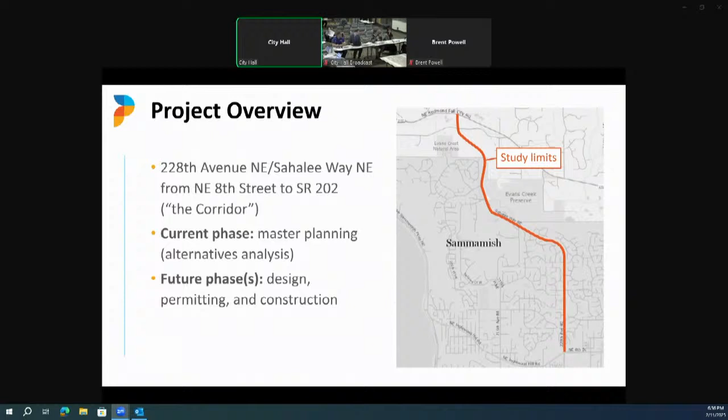The next three slides we're going to discuss what are the advantages of a corridor study. Part of it is comprehensive planning. We identify the current situation and also the future transportation demands, looking at future conditions and all the needs across different modes of travel for all users, so that it's safe for them and also accessible.

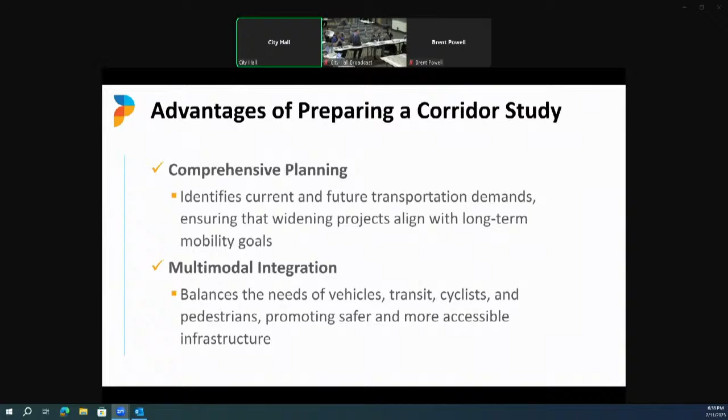We also look at the constraints in the natural environment, the environmental concerns, and the geotechnical realities that constrain the project. We're learning about those early on so we can look at cost-saving measures, and those impact and affect the different alternatives that we look at.

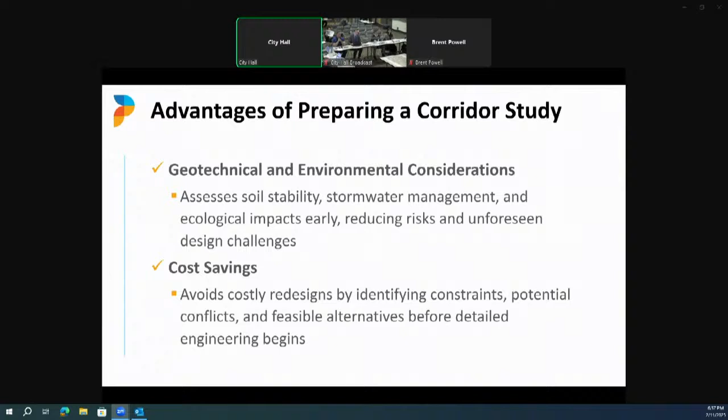We also had an opportunity for this project with broad community engagement. We involved the stakeholders early. For instance, the water district on the north end — we worked with them on their water replacement program, their water main replacement, because it was impacted by our schedule and where our improvements are going to be located in the future. So that was another benefit, we won't have to relocate those again.

This is the master planning process. We want to look at what we do near term and then long term on the corridor. We're going to have a long-term vision, but then we'll have chunks that we can start building in the near term that don't need to be partnered necessarily with grant funding.

The steps we've done to achieve that: early last year we had goal setting with the public and with council first, and we got the objectives, what was important to the community. Then we used all the different disciplines on this team to do a technical analysis and cost estimating, so we could bring alternatives that meet the goals we heard from last year. We're going to be going over that today.

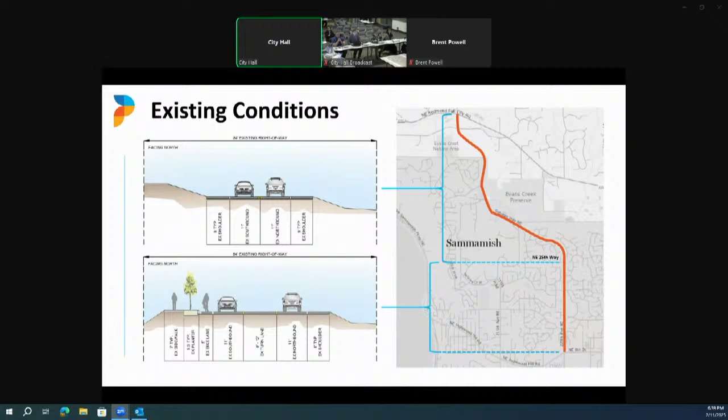And I think with that, I'll turn it over to Brent for the planning phase progress.

Thank you, Jed. Good evening, all. Brent Powell with the Perteet consultant team. I'm the project manager for Perteet on this one. I'm going to talk through the progress we've made to date on the planning phase for this study.

That's what we intend for it to be: up to 3 public-facing alternatives, with the idea that the next step will be sharing those back with the public. To date, we have not shared directly with the public for feedback any of these 10 or 6 current alternatives. The next step will be seeking public feedback on those 3, and then ultimately reaching a preferred alternative based on that public input, plus all the technical analysis and consultation with you all on the council here.

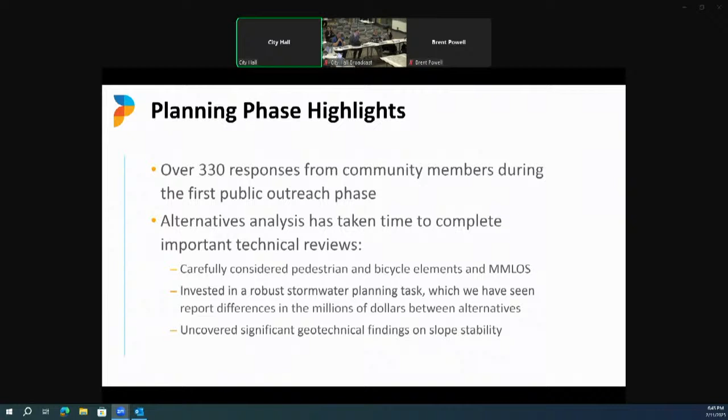Donald is going to be sharing some very notable geotechnical evaluation findings we've uncovered during this phase of the study, particularly on slope stability. I'll pass it to Donald, with a quick intro that he's with HWA Geosciences. They're our geotechnical engineer on this consultant team for the study and for the design phase of the project as well. We did evaluate the entirety of the corridor here from 8th all the way to SR 202.

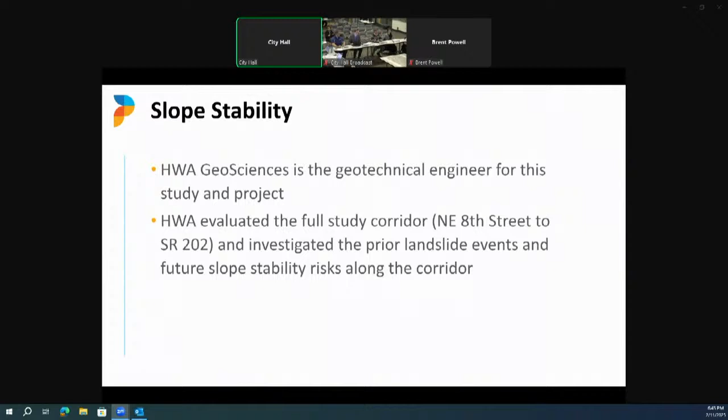I think many of you are familiar with the landslide history on this corridor, so that was of keen interest to Donald, and I'll let him share the results of his analysis.

I'm actually kind of disappointed I don't have entry music, but this is the moment you've all been waiting for. We're going to talk about soils. Try not to fall asleep.

So what we're looking at here is a LiDAR image of the entire corridor highlighted in red. The project alignment can really be broken into 3 distinct geotechnical zones. The southern portion has pretty much stable conditions, so we're not going to focus much time on those tonight. Then moving north, basically up till about 37th Way, you get to a point where there are a lot of adjacent landslides that haven't yet affected the roadway, but we need to consider them as we move forward in design. North of 37th, you have landslides that have significantly impacted Sahalee Way in the past and have been mitigated, but we need to consider those and what we do in those locations moving forward.

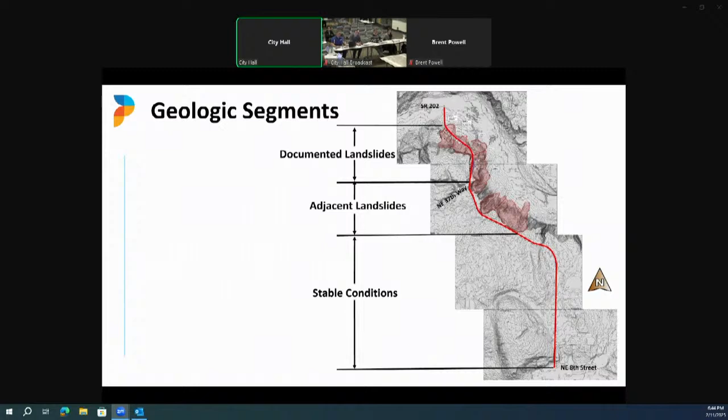So if you look at this a little zoomed in, this is again a LiDAR image, but we've highlighted in red each one of these landslide zones. There are 7 of them, 1 up in the north and 6 down here. Each one represents a distinct time in either recent history or ancient, prehistoric history in which there has been a landslide, denoted by these landslide scarps that you see in topography. There's one more as well, but we did not highlight it because it's far enough away from the road that it won't affect our project.

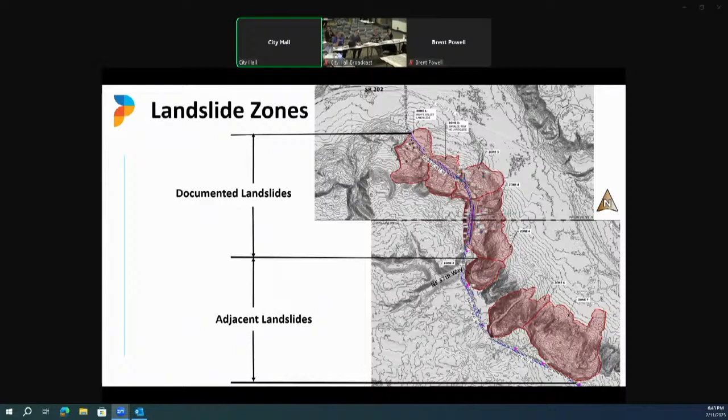So the first thing we're going to do is talk about zones 1 through 4, which are the northern portion. These are landslide areas that have affected Sahalee Way in the last 60 years and have been mitigated.

To the north, this one right here is the Happy Valley landslide. It was movement in the 1970s. They mitigated the movement through installation of horizontal drains. For those that don't know, horizontal drains means you drill into the side of the slope, put in a perforated pipe, it collects water out of the soil at the slope surface, and then you route it out to a suitable discharge location. It's a very common way to mitigate landslides that occur due to seepage, which almost all these do along the corridor, and I'll explain that in a bit. So anyway, that occurred and has been mitigated.

Zones 2 and 3, right here where the road bends, occurred between 1996 and 1997. Again, displacements within the roadway, mitigated by drains in 1997, so there's a theme here.

Zone 4 right here happened in 1982. You had up to 13 feet of movement over several months. Again, horizontal drains were put in. These ones aren't as distinct to see on the roadway, but when you're driving through here, if you look up to the west, you can actually see the headscarp on the side of the road where the soil used to be before it came down.

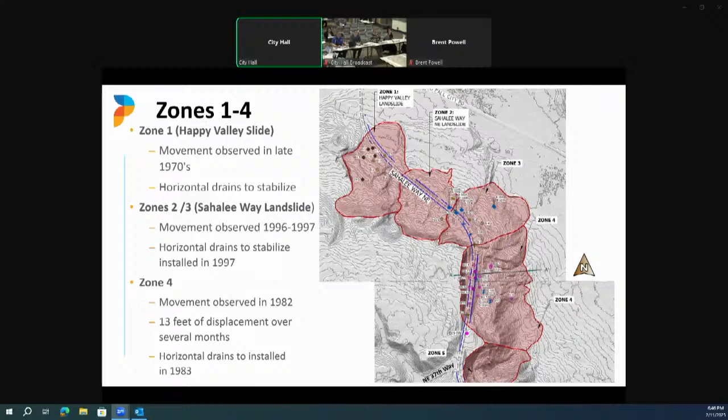This is a picture of that 1982 landslide. Again, that 11 to 13 feet. It's basically a slump failure that occurred there. Again, due to the soil conditions, they put in the drains.

These are some examples of the drains downslope that are currently being maintained. As you can see, water is flowing out of them. The more water you collect here and divert away, the more stable your site is.

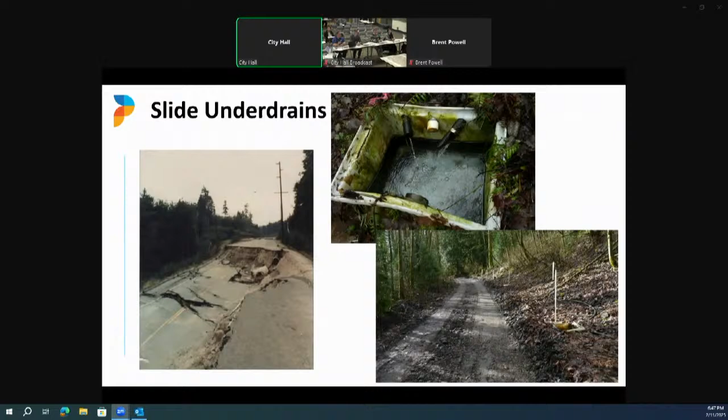Going into what has been done in the past: originally, when this Zone 4 landslide occurred, Golder and Associates, a geotechnical engineering firm, did a lot of the geotechnical borings and evaluations here, and was retained for the initial conceptual design of the roadway, looking at what concepts would work. They did a stability analysis which basically said you can do some improvements under static loading conditions and things will be roughly okay. Again, that's static loading, not earthquake.

Subsequent to that, we got involved because Golder no longer exists. We looked at the data they did and developed a much more elaborate geotechnical cross-section. You can see right here, that's Sahalee Way, and that's the headscarp you can see up at the top to the west. This really explains why all these landslides are occurring.

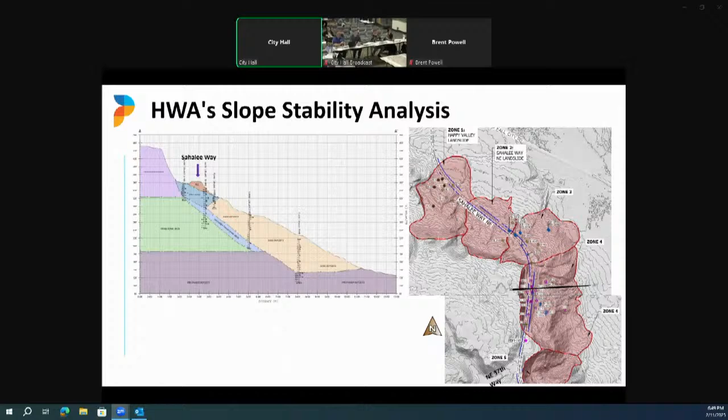So we evaluated that in our own analysis and came up with very similar answers to Golder: when we look at the proposed improvements in this area, we get factors of safety at 1.7. Basically, all you need to know about factors of safety is if it's less than 1, it's bad, that means you're going to fail. If it's greater than 1, you're not going to fail. So this meets industry standards for static loading, again in lockstep with what Golder analyzed before.

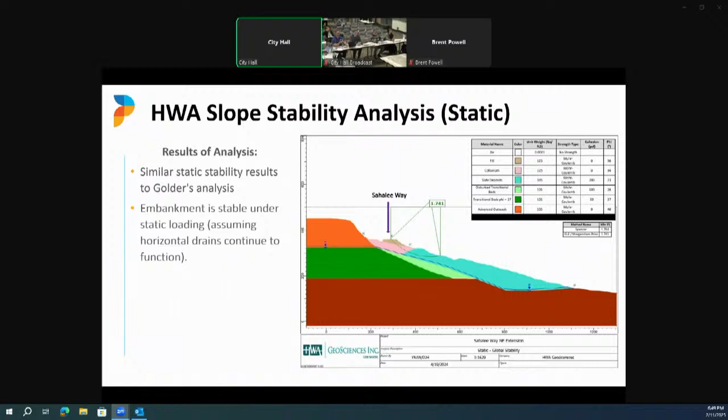The thing that's a little different is we also evaluated the stability of Zone 4, the 1982 slide, but you can assume the results of Zone 4 are very similar to Zones 1, 2, and 3 as well, because it's all the same rough geometry. This indicates right here that you have a factor of safety slightly less than 1, and as I mentioned before, factors of safety less than 1 are not good. This means that in a design earthquake, which for our industry is an earthquake assumed to return every 1,000 years, it's a big earthquake.

Obviously, we've never seen one—the last one was 1,100 years ago. That you're going to get some movement in the slope. We did a displacement analysis, and that movement is on the order of several inches, less than a foot. So it's not catastrophic landslide kind of movement. You've got to probably repave and regrade a little bit. So during a seismic event, you're going to get some movement out there, and that's something we need to acknowledge under the current loading conditions.

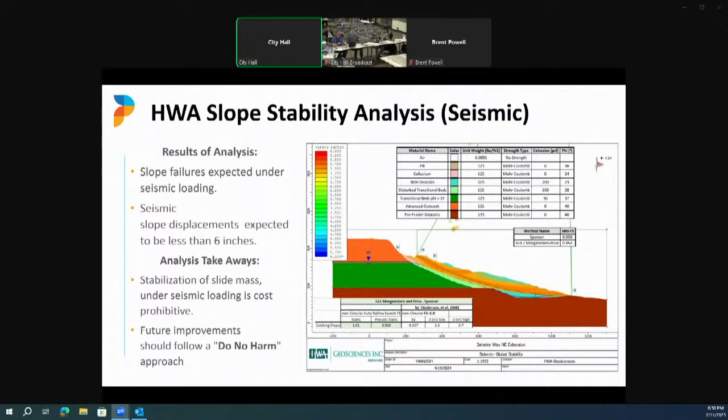One thing that's really important is that the drains in this area continue to function, because that is what is keeping this site stable. If those drains stop functioning, then water is going to build up and you'll start to see movement again under regular static loading conditions. What we are doing, and we're actually in the process of today, is installing a slope inclinometer right here.

This is basically a device where you drill a boring into the ground—this one we're taking to 125 feet. You put a pipe in it, and you can drop an instrument, and it'll tell you when you do drop the instrument, it should be vertical. And this is some outputs to it. Then if the land moves, the ground starts to move, the pipe deflects, and the instrument will read it, and it'll tell you where the deflection is.

We've put that instrumentation in the event that for some reason the drains plug here and we start to see movement. You can go out there and read that thing and get a lot of really quick information for a quick, appropriate fix to the movement. So it's a preemptive measure that we're putting in to help the city in case something happens.

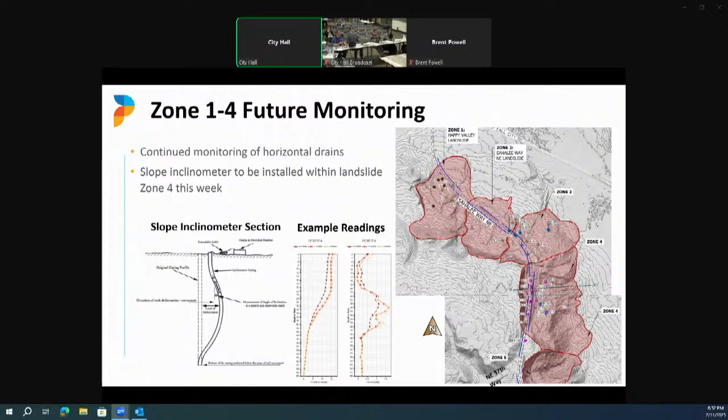The next area is to the south of 37th, and this is areas where these landslides are occurring for the same reason as the ones up there. It's just they have not reached the road yet. But what I really want to point out here is that Zone 5, right next to the intersection, and Zone 6 right here, those headscarps are feet off of the back of the fog line right now.

So these soil conditions here are good soil, high shear strength. You don't expect significant sliding except the seepage-driven part, which the seeps are down here. So what we would expect here from a future slope movement perspective is that weathering processes, freeze-thaw, you're going to loosen the soils on those steep slopes, and eventually at some time period between 10 and 25-year intervals, you generally get a slough of that 3 to 5 feet of soil, and it exposes new soil, and it tends to retreat back slowly. Zone 5 right here is probably the steepest of all of them, and likely the one that would move the soonest just due to how steep it is.

Zone 6 is also very close to the roadway, but it's not as steep. But the challenge of Zone 6 is if it does move, there's a whole bunch of utilities in there carrying water. If that breaks that utility, this goes from a slump to a water issue—it just makes it a lot worse. So I would say a failure here is more likely first. A failure here would be more challenging because it would probably take out more of the roadway.

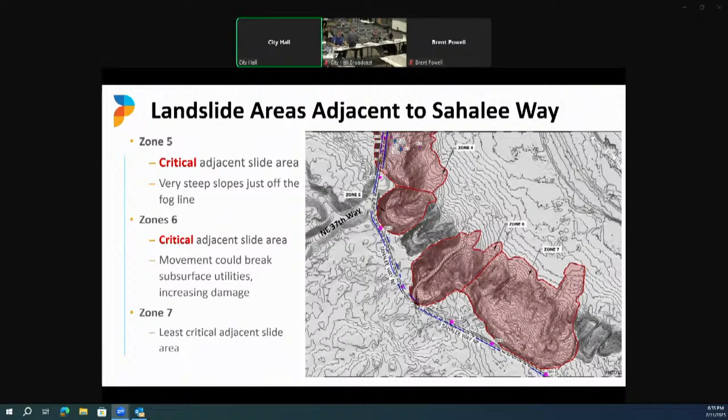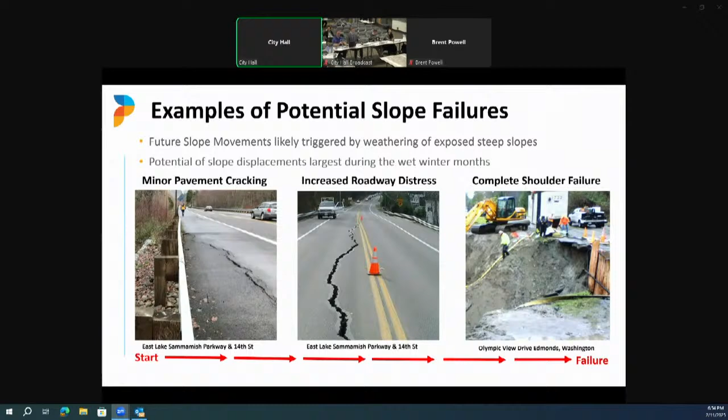This is kind of an example of what we would expect the progression of something to be if it did happen over time. You're going to start off with a crack off your fog line. The crack will move further in if you didn't mitigate it. And this is an example of what it can do if it continues. This is very much like what the '82 slide looked like—it's just this one's in Edmonds because I had a picture of it.

So again, what we're proposing to do is—we're right now in Zone 5 today, installing the slope inclinometer on the shoulder of the road. We're planning, in the coming weeks, to install one right here, and then in these critical areas, again, to preemptively be able to determine if something does move, to be able to come up with an appropriate fix quickly. The plan would be you put them in the ground, take an initial reading, and then read them once or twice during the winter because that's the time things would move. Or if somebody said there's a crack that developed, we'd go out and read it and then come up with a solution.

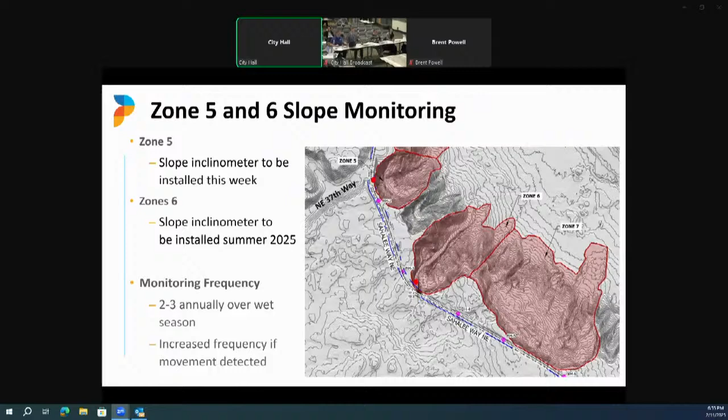So going backwards, in any of the alternatives we look at along this corridor, it's likely going to be doing something at the top of Zone 5 and Zone 6, which are close to the lands, or close to steep slopes that have experienced movement and we expect to move in the future. So it's likely this project will need to mitigate in these locations to make sure that any movement that occurs downslope, which likely will over the design life of the road, does not affect the road. So what we've looked at is there's some ways to do that.

Essentially, strategically placed tangent pile walls or secant pile walls are likely the best solution in those specific areas. What these are: you drill a hole, called a shaft, probably down 50 feet, about 3 feet in diameter generally, and fill it with a rebar cage and concrete. A tangent pile wall has them closely spaced. A secant pile wall has them overlapped.

The reason you'd look at different ones: secant pile walls are a little more expensive, but the nice thing is there's no gap between the concrete. You basically make a concrete wall, so if things downslope of it fail, your soil above it won't migrate through due to water over time. So those are some of the solutions we'd expect to implement in areas where landslides are currently coming close to the roadway but have not encroached on it.

Our approach in areas where landslides have already impacted the road in the past, i.e. north of 37th, would really be to do no harm. What I mean is, if you're doing improvements there, you don't want to add any additional load to the roadway. So raising the grade would add additional load in conventional construction, and widening the road would add additional load in conventional construction.

But there are things like lightweight fill materials you can use that will offset that. They make lightweight cellular concrete you can put in where you take out heavy soil, put in this stuff that's really light, and that would allow you to achieve that do-no-harm approach.

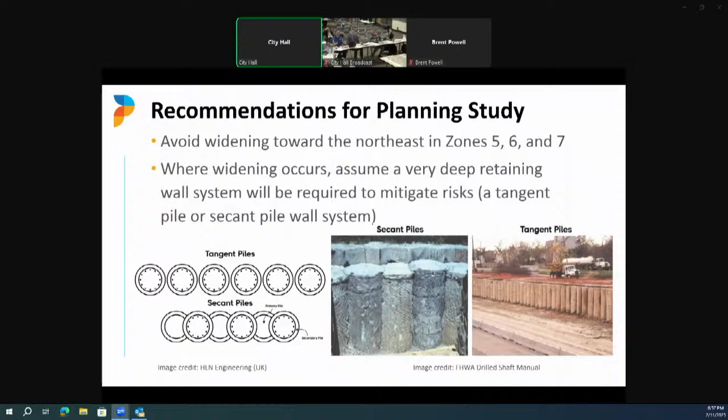So I think with that, I'm going to either open it up for questions or pass it back to... Yeah, we'll talk through this slide first and then have a discussion opportunity for this.

One of the things we thought was important to understand once this information came to light was, what are we talking in terms of cost if you wanted to go the mitigation route? I want to be very clear, you don't have to decide on that or even weigh in on it tonight. We're going to table this, do some extra analysis, and come back later to nail down an answer. But our initial cost estimate for the wall systems south of 37th, for those 3 zones Donald was just talking through, would be around $15 to $20 million total to reinforce those 3 slope areas.

That work we've been discussing could happen as part of a Sahalee Way corridor redevelopment. It could happen before a Sahalee Way corridor redevelopment. It could happen potentially after a redevelopment effort. So there's flexibility there. Unfortunately, though, we haven't been able to identify any funding sources that seem like they would be trying to fund this type of improvement.

There is a FEMA funding program, at least currently. We'll see if that remains, but the way it's been operating in recent years, it looks to larger scale failures that really would compromise life safety. And as Donald was describing, this is more of a gradual kind of suffocation of the corridor type of thing. So it wouldn't be the type of candidate project we think would be competitive for that type of federal grant. So our next step is we're going to work with Jed, Donald, the whole team here, to do a risk matrix to provide some extra information for you all about trade-offs, benefits, and costs for this.

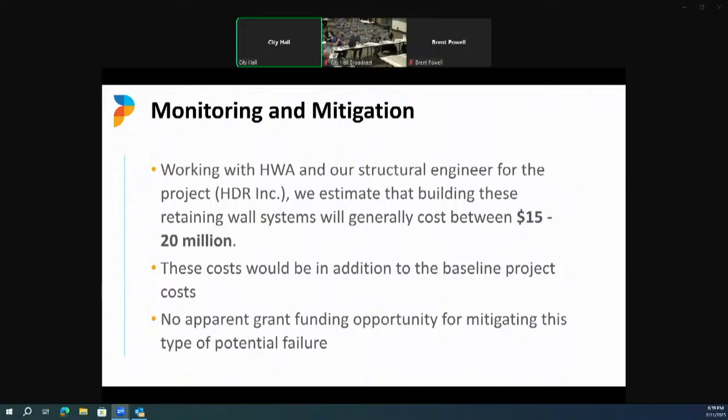Mr. City Manager. Yeah, team, one thing that I think would be helpful, and I know because I've sat with Jed and gotten the individual rundown, but... Is this only if we build something new, or is this necessary for right now?

North of 37th, maintenance of the drains is necessary moving forward, or else you're going to have a problem.

South of 37th, if you just decided we're not going to build anything out there, this problem doesn't go away. Over time, on the order of 10 to 15 years from now, especially Zone 5, which is near 37th, is likely going to have a near-surface skin slide that will affect a portion of the northbound travel lane, just looking at the geometry and how close it is. So regardless of if we do anything, that will likely occur.

Now, do you have to proactively make that not occur? Because again, it's not a catastrophic failure, it's something that's going to affect. You could come back in and repair that under an emergency repair perspective. But if we do something, i.e. we change the fog line in those areas, then at that point we're in a requirement to bring the stability of that section of roadway up to industry standards, which means you'd have to implement something.

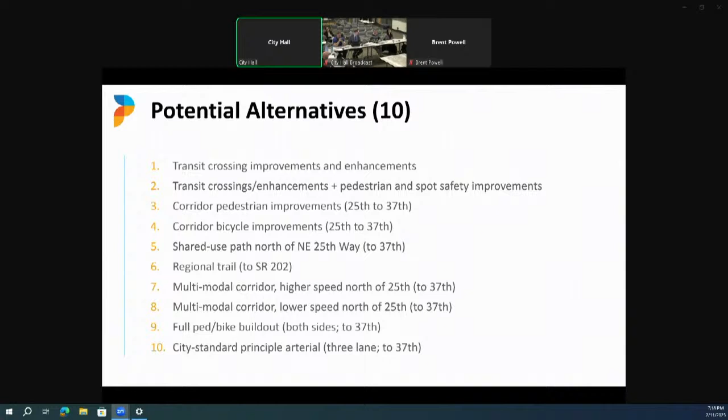There were some treatments that took things all the way up to SR 202, but many of these stopped at 37th, and the final 6 alternatives all end at 37th. So about doing no harm, we're certainly not proposing any harm to the portion between 37th and SR 202 with these 6 alternatives.

We've retained a spot treatment alternative in alternative number 2. We have different versions of a pedestrian-only focused alternative we called 3A and 3B. Then we have 7 and 8, which we'll talk about in detail, really trying to capture all modal users, pedestrians and bicyclists. And I should mention transit is incorporated throughout all of this.

The final alternative we advanced is number 10, the application of the city's standard cross-section for a principal arterial roadway, which can either be a 5-lane facility or a 3-lane facility. Based on our traffic modeling, we thought a 3-lane facility was all you would need for long-term sustainability out here.

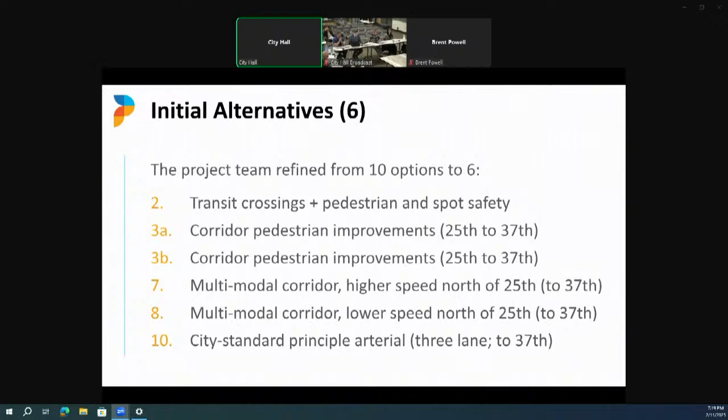So I'm going to share a few details on alternative number 2 and then give a high-level summary comparison. At this point we're proposing to advance alternative number 2, a very foundational alternative. We viewed this as our spot treatment approach, so everything incorporated here is also incorporated in the remaining alternatives, which is why I want to take some time to walk through it.

Number one, we heard a lot of feedback about transit improvements needed in the corridor, particularly stop enhancements and safety enhancements at crossings, to allow people to connect across the busy Sahalee Way corridor to reach a transit stop, morning or evening. This includes upgrades at intersections, attempting to achieve at least some minor speed reductions at those unsignalized intersections for bus stop locations. Traffic speed correlates to higher fatality rates, so that's a key sensitive area for safety improvements.

There are a couple portions adjacent to the Sahalee Golf Course area. The Sahalee Greens and Plateau Point neighborhoods do not currently have left turn lanes. That's another safety treatment we identified, a proactive one. This corridor fortunately hasn't suffered from a bad safety record, but there's always opportunities to be proactive, and this is one of those, trying to separate out left turn movements from higher speed trailing traffic behind them.

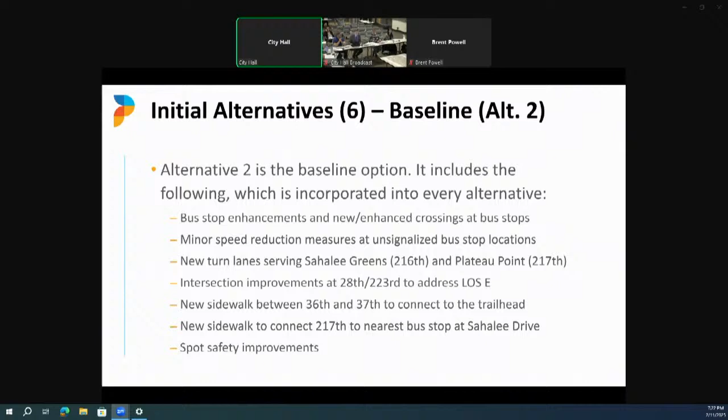The other sidewalk segment would be from 217th, the Plateau Point area, the one development on the east side of the corridor. Currently if you wanted to live there and use transit, you'd have to walk to and from transit via the shoulder, so this is a proposed sidewalk segment to enhance that connectivity. There are also a couple various safety spot treatments we've considered, and again all of these bullet points are folded into the remaining alternatives as well.

There's a lot of text on this slide. I don't want to belabor too many points, but this illustrates some of the key differences between the 6 alternatives we were studying. The bold elements are the ones that are changes from the existing condition, so you can see there's a different combination of those for all 6 options.

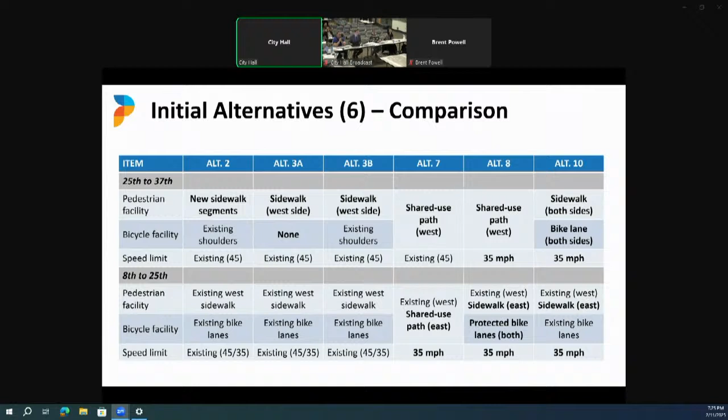I want to zoom in on the really productive workshop session we had with representatives from the Public Works Group. That occurred in December, and we settled on a recommendation to advance Alternative 2, which is spot treatment, and Alternative 3B, which would build a continuous sidewalk and still provide shoulders for bike use on the corridor, with that sidewalk going all the way up to Northeast 37th.

Alternatives 7 and 8 are the ones we wanted to bring to this group tonight to discuss in more detail. Both address pedestrian needs with a similar type of treatment, but they have a principal difference in the proposed speed limit. With that, I'm going to turn things over to Janessa to talk through that difference in more detail.

Good evening, just a quick introduction. My name is Janessa Donato with Perteet. I'm one of the engineers on the project team, and with the next few slides, I'll be summarizing the main differences between Alternative 7 and Alternative 8.

The core difference is essentially the posted speed limit north of Northeast 25th. Alternative 7 proposes to maintain the existing speed limit of 45 miles an hour, while Alternative 8 proposes to lower the speed limit to 35 miles an hour. To encourage that lower target speed, Alternative 8 includes a series of proposed intersection treatments, most likely roundabouts, to produce that traffic calming effect.

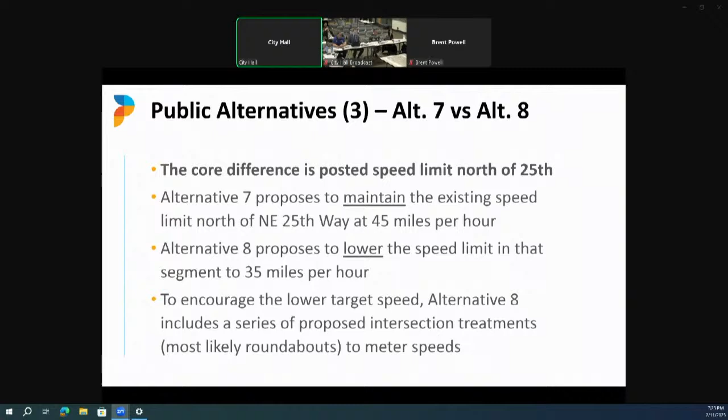Just to reiterate, a key element considered during development of the alternatives was improving pedestrian safety, or both safety and comfort for pedestrians and bikes. To achieve that, Perteet applied the level of traffic stress metric, also known as LTS. As a quick refresher, that's expressed as an integer from 1 to 4, with a lower number indicating greater likelihood of users to access a facility.

The scores are determined on the separation of vehicles from pedestrians and bikes, and how and the type of separation depends on the speed. In the north segment, from Northeast 25th to Northeast 37th, both Alternative 7 and Alternative 8 propose a shared use path on the west side. In the higher speed Alternative 7, a barrier treatment is proposed as the separation, while in the more urban setting of Alternative 8, a planter strip is proposed.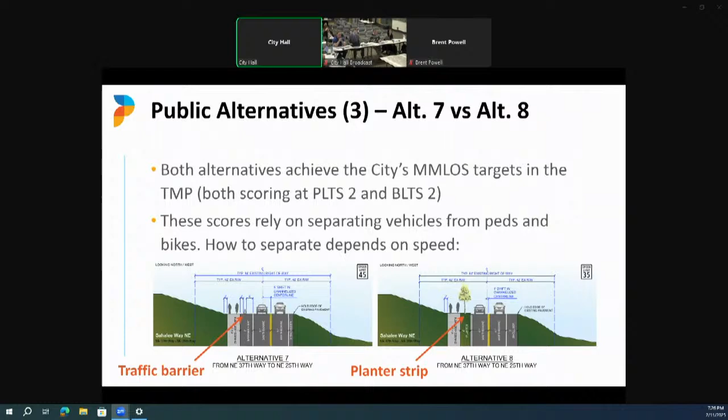Sorry, I think I missed the last slide. I wanted to mention that both alternatives do meet the multimodal level of stress target of 2, listed in the TMP for both peds and bikes. For the speed control strategy, Alternative 7 implements some minor treatments at pedestrian crossings, such as curb extensions and curb bulbs, whereas Alternative 8 proposes a series of roundabouts.

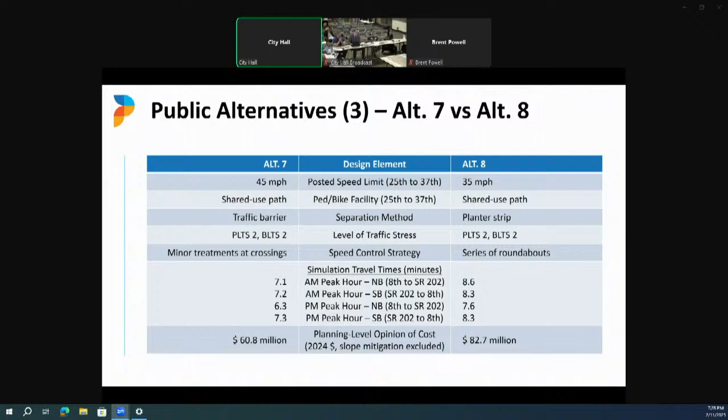Lastly, the bottom row is a quick comparison of the planning level opinion of cost for the total corridor. From 37th to 8th, we have 60.8 versus 82.7. Again, that's in 2024 dollars excluding the slope mitigation, so that's a difference of about $22 million.

Lastly, we also wanted to provide a summary of all of the alternatives. These are the initial planning level opinion of cost for all 6, broken down by the north segment, south segment, and overall corridor total. The numbers reflect what was expected, with the baseline Alternative 2 being on the lower end, and the city standard principal arterial of Alternative 10 on the high end.

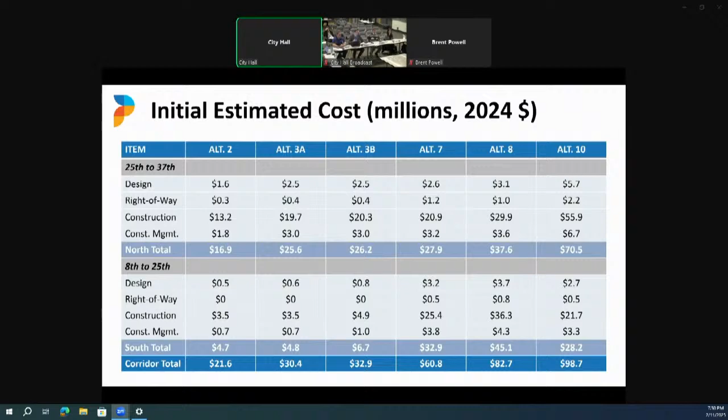And we certainly recognize those are very large figures. We have not reached this stage yet, but once we nail down a preferred alternative, we'll be very focused on figuring out a phasing plan, recognizing that it's very unlikely that even a $20 million project would happen all in one phase. We would explore how to break that down over time, even considering different inflation rates for those separate projects. That's a very core element of this master planning work, the financial understanding of the choice you're making with selecting a preferred alternative here. More to come on that, but just wanted to disclose that those are all 2024 numbers, and we would break them down into different projects.

Jed, I think you were going to take us home here. Oh, thanks, Brent. So just looking ahead, we're looking at public engagement for probably the first week of April. We want to share these concepts with them and get their feedback so we can come back to council. We're going to collect that data and prepare for that. That's one of the outcomes we're looking for from this meeting. We're also going to concurrently do the risk analysis to think about how to analyze the risk of those slides that might happen 10 to 25 years out in the future, so you'll have that information after the public feedback is gathered.

We'll come back to council in June to stay on target with our schedule. Then after we get the feedback from council and the selection, we're going to do a final analysis at higher resolution, looking at the cost estimates and phasing. We'll have a whole package, a corridor plan developed that can be presented to council. We're tentatively looking at adoption for October, which will then authorize going to 30% design. From 30% design, you could start breaking out specific features of that project that could be done on a phasing basis.

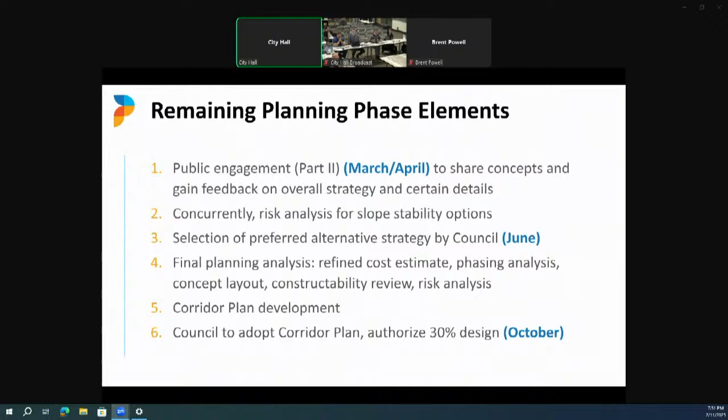Next slide. Okay, so this is one of the early slides we started with, and we're coming back to discuss alternatives 7 and 8. How do these meet at the high end, with an alternative starting at the low end at 2, then 3B, then 7 and 8 at the high end, which is more closely aligned with council objectives. If we can choose, we would take that to the public. Then is there anything else we should be getting when we reach the public meeting in April that we can bring back to council? And then, just for the future, not for tonight, what should we do to address the unmitigated slopes?

And then, is there any more slides? Is that it? Yep, that's the end of our slides there.

Just really quick, Jed, I see the large maps out here in front. Are we orienting people to those? Is it get up and take a look while we're ruminating and contemplating, or how are we engaging with those, and what do they show us?

Oh, sure. So we've got handouts right now with the different alternatives. Our focus that we're thinking is 7 and 8, and we can talk about some of the features of that. Those have more features than the earlier options. So I think a discussion of 7 and 8 is going to answer a lot of questions, but we can address things about 2 and 3B as well, or any of the alternatives. 7 and 8 because I think there's a big cost difference in those two, there's $20 million between those. So we would like to figure out, we'd like to break it down to have one concept alternative we could take to the public among the 7 and 8.

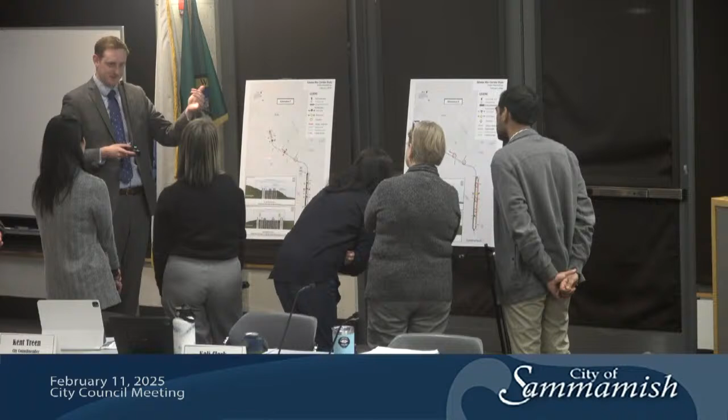When we do design work, we have design speeds, which set some of the criteria for how we design our geometry. So there are certain elements that might be reflected in that by choosing a higher design speed for a faster bicyclist. But you're correct in pointing out the challenge here, and this was something the public noted as well - some pedestrians said they'd feel actually less comfortable using this than a regular sidewalk. So it's something to weigh as we evaluate options here. The benefit of installing it is a much smaller footprint, and it really does have a significant amount of cost savings, and it comes down to the question of how much people are going to use a facility.

That's one of the questions we're planning to ask the public in the next round here as we share different alternatives - as best you can estimate, would you see yourself biking on the corridor, walking on the corridor, are there any barriers to that? Those types of questions.

Yeah, I think that'd be useful information to hear about that pedestrian e-bike relationship. And I'm sure we have not come up with any speed limits on electric bikes - how fast they can be traveling if they're in a shared lane with a pedestrian, as opposed to in a designated bike lane. We're hearing this very much from the public, that it's becoming a problem for pedestrians to deal with. But it would be interesting to figure out the usage on that part of the roadway, and if it really is a significant issue - but 10, 15 years from now, it may be a very significant issue.

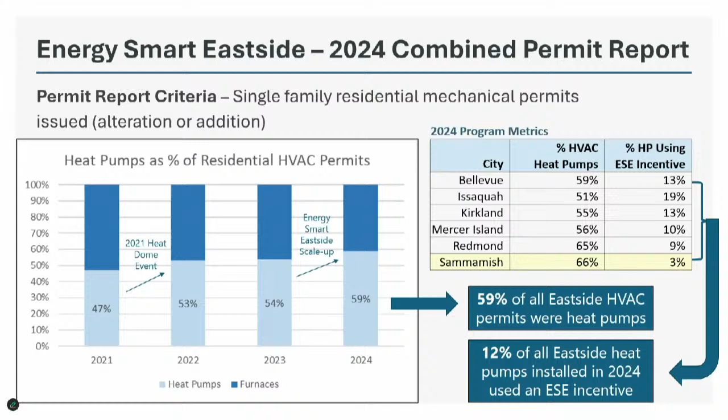Sammamish has the highest heat pump adoption rate of all of our neighboring cities, which is really wonderful and something that should be celebrated. And you can see there we do have the lowest percent of those heat pump installs utilizing the Energy Smart Eastside incentive. This is explained through us joining the heat pump program at the very end of 2024. So we'd really love to see that number go up, recognizing that this also is specifically targeting our lower income residents. So that was the program-wide statistics.

Now we're looking specifically at 2024, recognizing that this is just the end of 2024. So we'll have a really great lens into how this program is performing at the end of 2025 when we have a full year of being an active participant. We had some really great numbers.

You can see our heat pump installations going back to 2021 in this graph on the left here. And as I had mentioned on the previous slide, we've got 66% of all HVAC permits as heat pumps, with 3% using the ESE incentives, which is pretty great starting numbers, having only been involved in this program for 1 quarter. Any questions on these numbers before I move on?

We're going to cover program goals in the next slide.

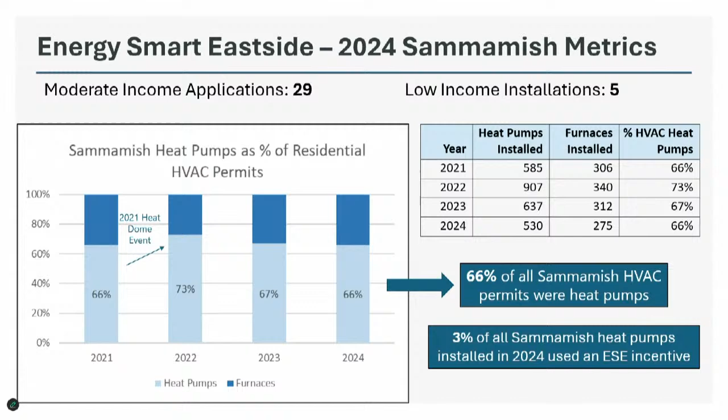Looking forward to this year and the next, as a collective body, the Eastside Climate Partnership has looked at adoption rates and metrics over the last couple of years and established program-wide goals of 65% residential HVAC permits being heat pumps. As a reminder, the number for 2024 was 59% for the program as a whole. Sammamish is already surpassing this, maintaining numbers around 66% in 2024, which is really great.

But we're still looking towards 2026 with that 70% HVAC adoption being heat pumps. So we've still got a little ways to go, and we're really happy with the numbers so far, and we're going to continue that community education and outreach.

Part of that, we have an upcoming heat pump workshop for Sammamish residents on March 26th at City Hall from 6:30 to 8 p.m. We'll have a heat pump contractor as well as some Energy Smart Eastside program staff present to give a presentation to residents who may not be familiar with this technology, answer questions, and generally talk about energy efficiency in the home.

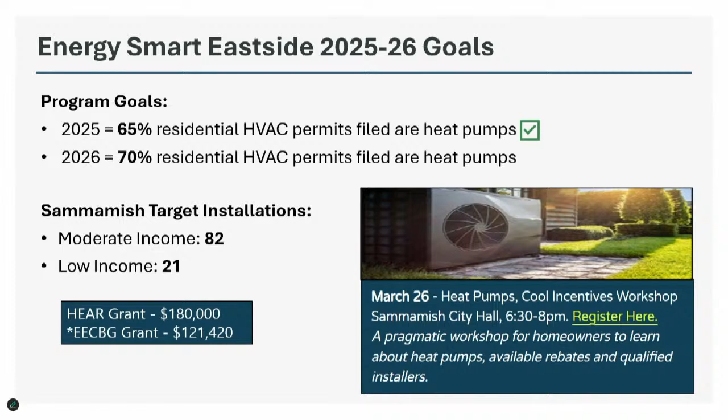All right, next slide. Moving on from Energy Smart Eastside, and we'll have some time at the end for questions, we are also working on our green purchasing guide.

This was one of council's goals for 2024, and we do have a purchasing guide established. We ran a pilot program with the Parks Department in late 2024 to see how this would work out, and worked with some folks in finance to make sure we're able to accurately track invoices.

Moving forward, any purchase—and I want to be clear this is purchase of materials, not contract procurement—so materials for events, materials for outreach, any kind of giveaway items, and some of the work our restoration team is doing, will really just be tracked, giving credit where credit's due for purchases already being made.

For example, purchasing compostable cups for our break room is something already being done, but we aren't tracking that right now. So being able to track both dollar amounts and also encourage the purchasers in each department to really be thinking about sustainability at the forefront when they're going to purchase these items.

That is the point of this green purchasing guide, and we'll be rolling this out in the coming weeks, starting with a presentation at the February all-staff meeting, and then I will be meeting with individual departments to help answer questions. Obviously different departments have different purchasing needs, so there might be some nuance we'll be working through as we go through implementation.

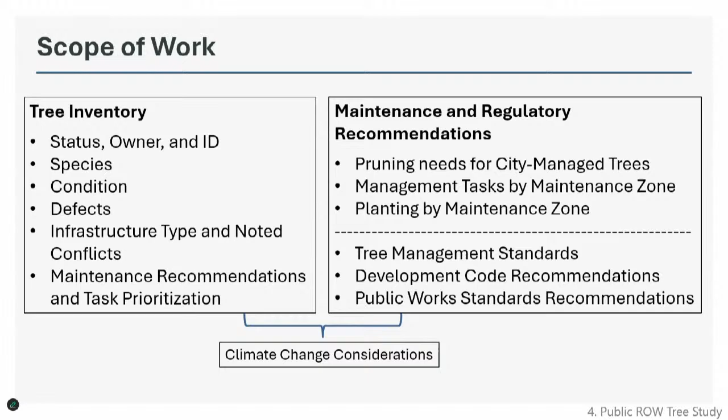Since Rose covered the background and methodology of the study, I will be covering Facet's findings and recommendations. Facet examined a total of 1,525 trees within the 19 public works maintenance zones, and approximately 1,100 of these trees are maintained by the city.

Great news, the majority of the trees examined are in good health. And also, despite the bomb cyclone in November, our maintenance team reports that very few of the city-maintained right-of-way trees were significantly impacted. So this means Facet's findings and maintenance recommendations are still usable by our crews.

Looking ahead, we'll be focusing on implementation of Facet's recommendations for ongoing care, prioritizing resiliency, and ensuring accurate data management for the city-maintained trees. So we are happy to report the successful integration of Facet's updated GIS data into CityWorks, our asset management system. With this update, staff will be able to easily access the database of all the right-of-way trees within our maintenance zones.

This data integration will be especially helpful with the Public Works maintenance team workflow. The maintenance team will have access to up-to-date tree data, allowing them to create work orders more efficiently and provide real-time updates like maintenance or removal to CityWorks, ensuring that the data remains current.

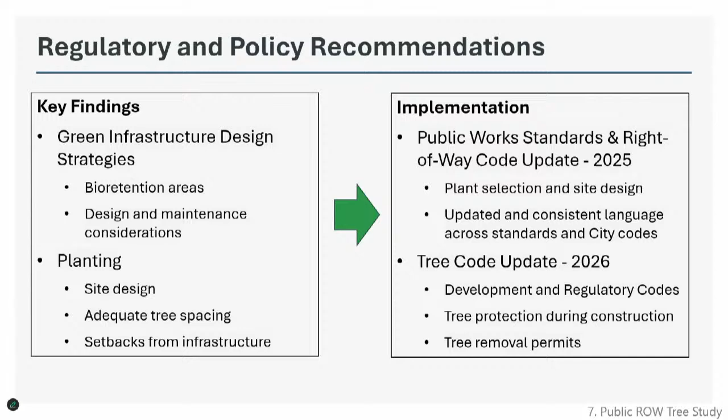So we have this question for council: does the council believe this work achieves the council's goals of preserving and enhancing the city's public street tree assets? Thank you.

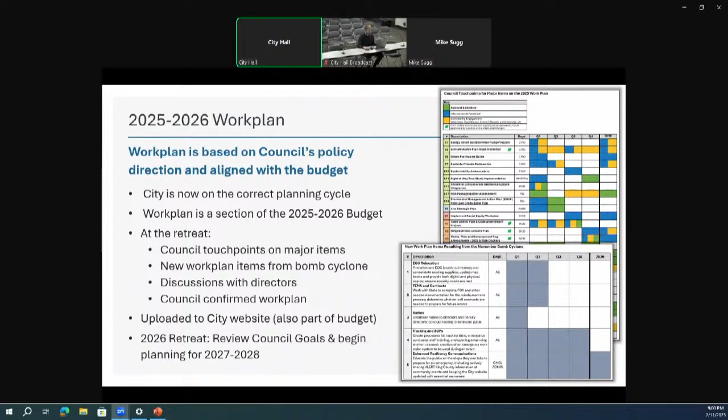The work plan is now uploaded on the website. It can be found both within the city's budget document as well as on the City Council webpage under the council resources sidebar, along with your goals, legislative priorities, and other relevant documents. That's all I've got for my short recap. Appreciate council's thoughtful engagement with us at the retreat and on the work plan. With that, I'll hand it back to you, Mayor, if there are any questions. Council, questions?

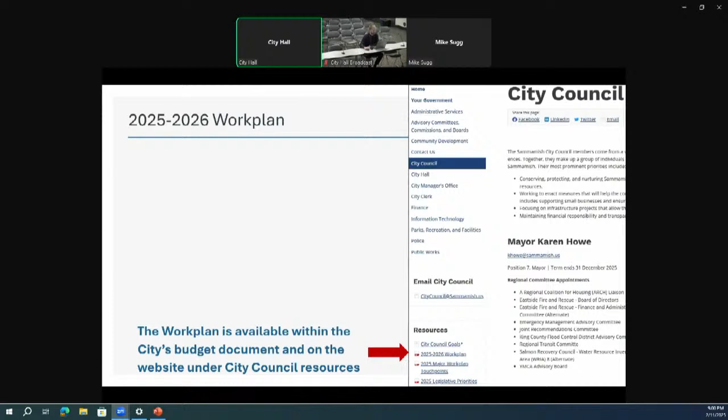Certain things just don't mix. And in the Pacific Northwest, vehicle leaks and Puget Sound certainly don't mix. When it rains, water carries pollutants from cars to storm drains that lead to our rivers, streams, lakes, and Puget Sound. Fix car leaks as soon as you detect them. Healthy families, healthy communities, healthy Puget Sound. Now that's a perfect mix. PugetSoundStartsHere.org.

Certain things just don't mix. Ready, Sammy? Fetch! I should have got a dog. And in the Pacific Northwest, pet waste and Puget Sound certainly don't mix. When it rains, water carries pet waste bacteria to storm drains that lead to our rivers, streams, lakes, and Puget Sound. Pick up pet waste every time, even in your own backyard, and throw it in the trash. Healthy families, healthy communities, healthy Puget Sound. Now that's a perfect mix. PugetSoundStartsHere.org.

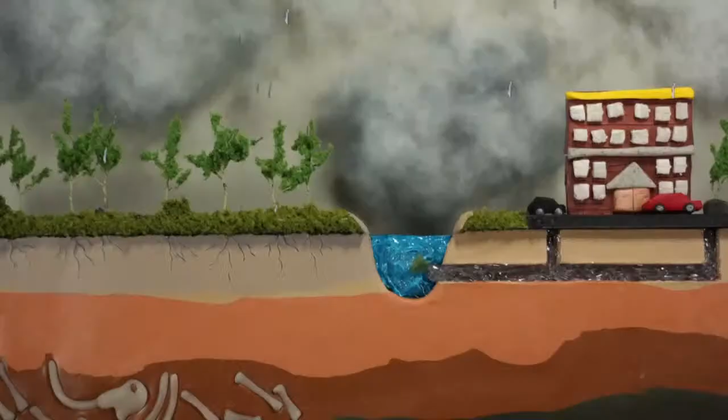Certain things just don't mix. And in the Pacific Northwest, vehicle leaks and Puget Sound certainly don't mix. When it rains, water carries pollutants from cars to storm drains that lead to our rivers, streams, lakes, and Puget Sound. Fix car leaks as soon as you detect them. Healthy families, healthy communities, healthy Puget Sound. Now that's a perfect mix. PugetSoundStartsHere.org.

Certain things just don't mix. Ready, Sammy? Fetch! I should have got a dog. And in the Pacific Northwest, pet waste and Puget Sound certainly don't mix. When it rains, water carries pet waste bacteria to storm drains that lead to our rivers, streams, lakes, and Puget Sound. Pick up pet waste every time, even in your own backyard, and throw it in the trash. Healthy families, healthy communities, healthy Puget Sound. Now that's a perfect mix. PugetSoundStartsHere.org.

Certain things just don't mix. And in the Pacific Northwest, vehicle leaks and Puget Sound certainly don't mix. When it rains, water carries pollutants from cars to storm drains that lead to our rivers, streams, lakes, and Puget Sound. Fix car leaks as soon as you detect them. Healthy families, healthy communities, healthy Puget Sound. Now that's a perfect mix. PugetSoundStartsHere.org.

Certain things just don't mix. Ready, Sammy? Fetch! I should have got a dog. And in the Pacific Northwest, pet waste and Puget Sound certainly don't mix. When it rains, water carries pet waste bacteria to storm drains that lead to our rivers, streams, lakes, and Puget Sound. Pick up pet waste every time, even in your own backyard, and throw it in the trash. Healthy families, healthy communities, healthy Puget Sound. Now that's a perfect mix. PugetSoundStartsHere.org.